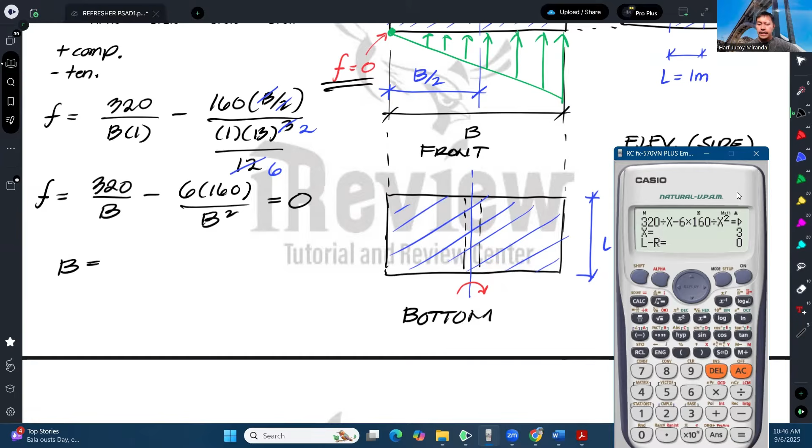Right? So that is our answer for number 13, 3 meters.

Okay? Next item for the same situation.

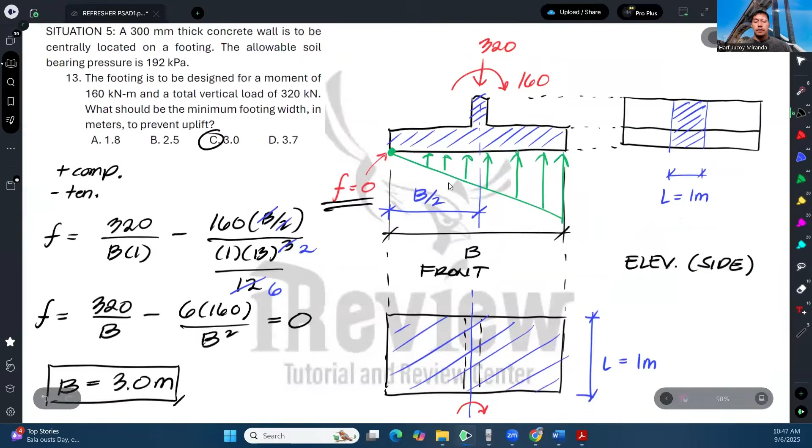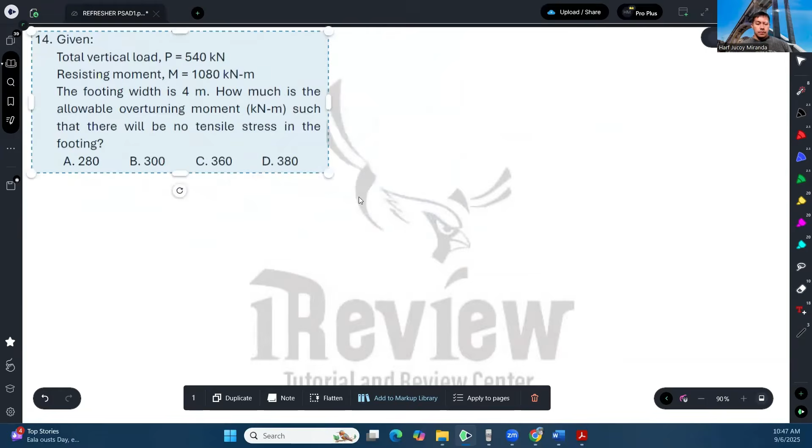Okay, so given, total vertical load is 540. Resisting moment is 1,080 and you're already given the footing width, 4 meters. How much is the allowable overturning moment such that there will be no tensile stress in the footing?

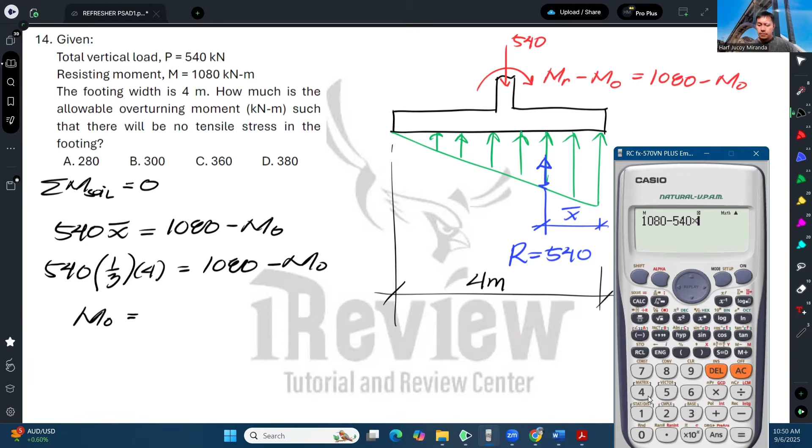Okay, 360 kilonewton meter.

Okay, and that is letter C.

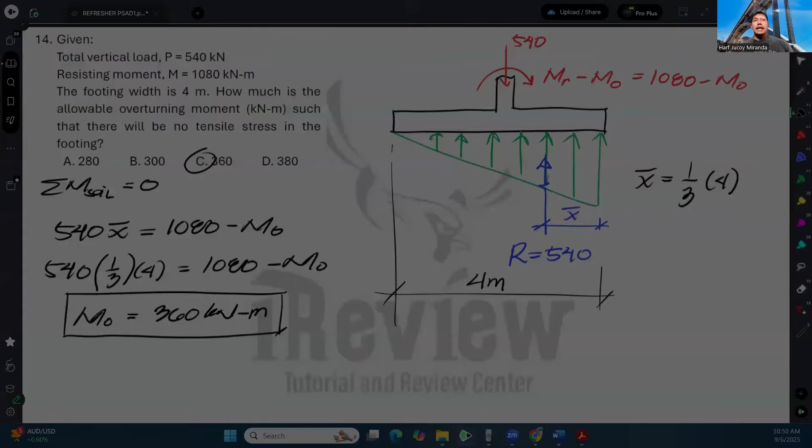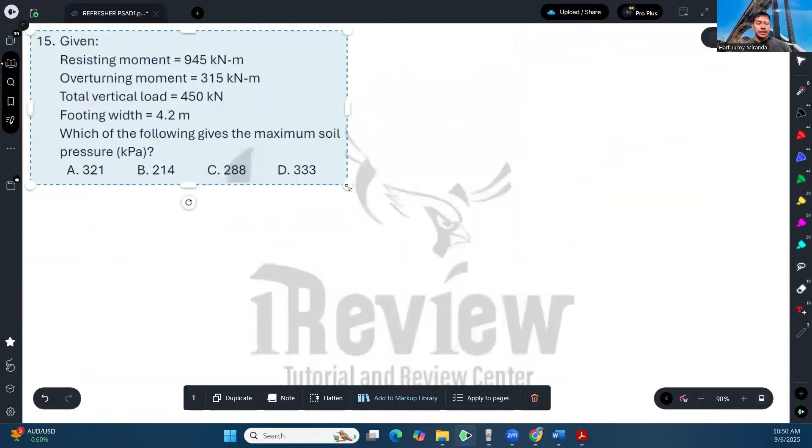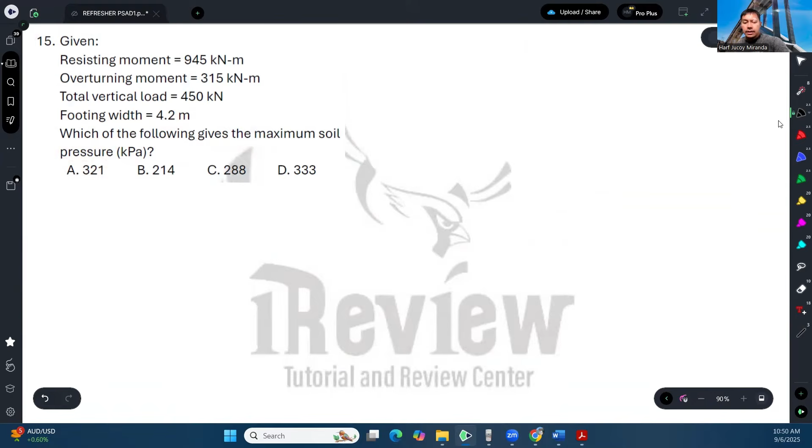Now, lastly, for item 15, same situation. Iba na naman yung given. This time, you're given both the resisting moment and the overturning moment, the total vertical load, and the footing width. So which of the following gives the maximum soil pressure? Actually simple lang sana ito, kaya lang we have to be careful kung meron bang tension, kasi ngayon given na lahat eh. So ngayon tatanong tayo, ano yung maximum soil pressure?

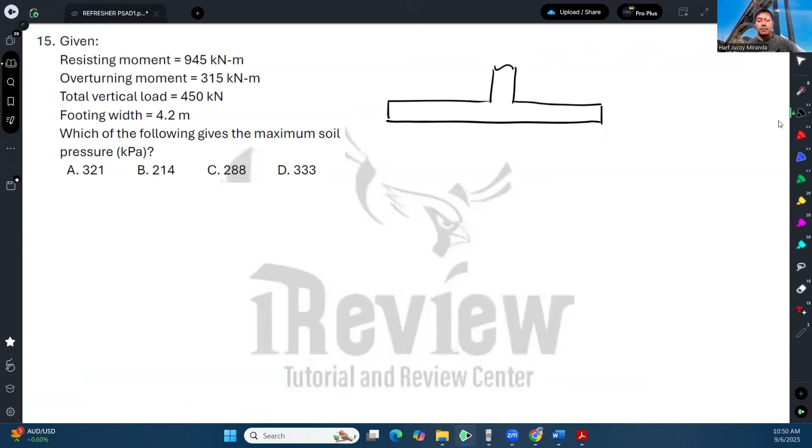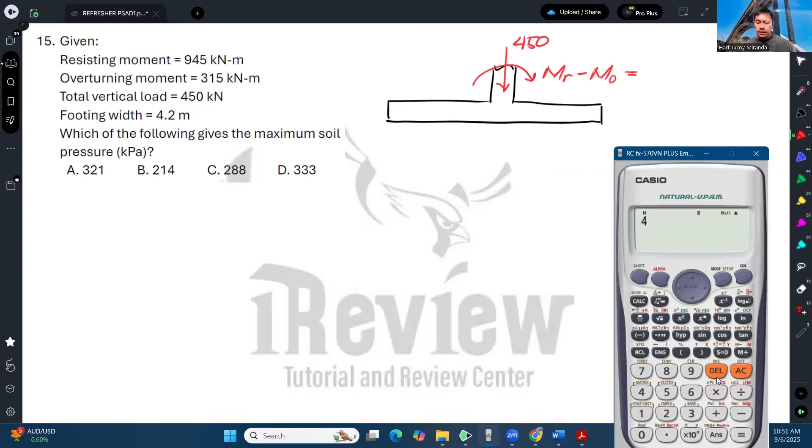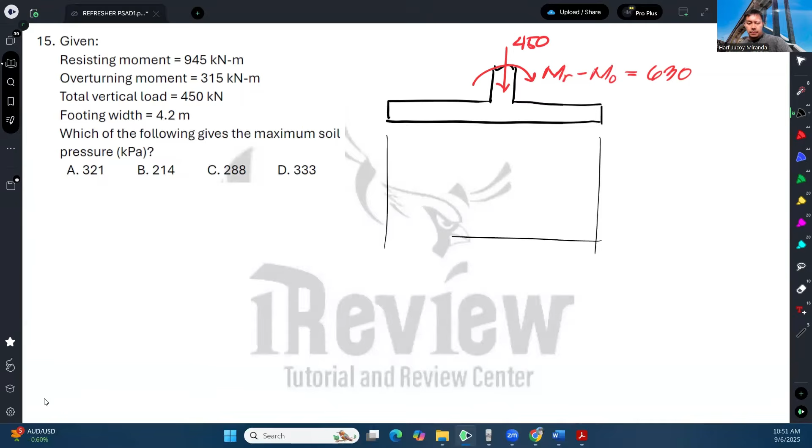So if there is no tension, lagay ko muna ng values, 450, tapos ito MR minus MO. So 945 minus 315, that's 630. And then this is for 4.2. Okay, so ngayon para malaman natin kung magkakaroon ba dito ng tensile stress, kasi dalawa ang pwedeng case na mangyari.

Case 1 is yung pressure diagram mo ng soil, ganito trapezoidal. Ibig sabihin, yung soil mo is under pure compression. Kapag ganyan, to calculate the stresses, gagamitin lang natin yung combined axial and bending, yung P over A plus or minus MC over I, etc.

Pero pag nangyari to, yan, so meron kang tensile part ng soil, hindi na valid yung P over A plus MC over I. Hindi na siya valid. So paano ko malalaman kung meron itong tension?

So merong criteria, yung mga libro, yung ibang mga module, may criteria na kailangan daw yung eccentricity mas malaki or mas maliit sa B over 6, blah blah blah. Pwede niyo kabisaduhin yon, pwede niyo tandaan yon. Pero ang pinakamabilis para sa akin is kunin niyo na lang yung stress dito sa kabila. Pag nag-negative yan, or ibig sabihin pag nagkaroon ng tension, bawal gamitin yung P over A plus MC over I para ma-solve yung stress dito sa maximum.

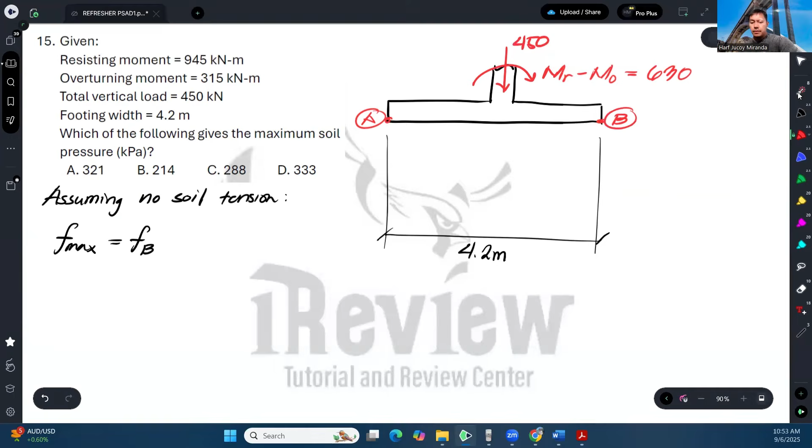So tingnan natin, ano ba ang magiging stress dito? Tawagin ko to na corner A. Kapag in-assume natin na walang tension, no soil tension, so yung magiging maximum pressure natin ay equal sa stress sa B, which is going to be P over A plus MC over I. Assuming no soil tension.

So paano malalaman kung walang soil tension? Kunin mo muna yung FA. So ang FA ay P over A tapos minus MC over I. Tignan natin, very quickly: 450 over 4.2 times 1, kasi nga ano to, wall footing. Minus M, 630, yung C natin ay 4.2 over 2.

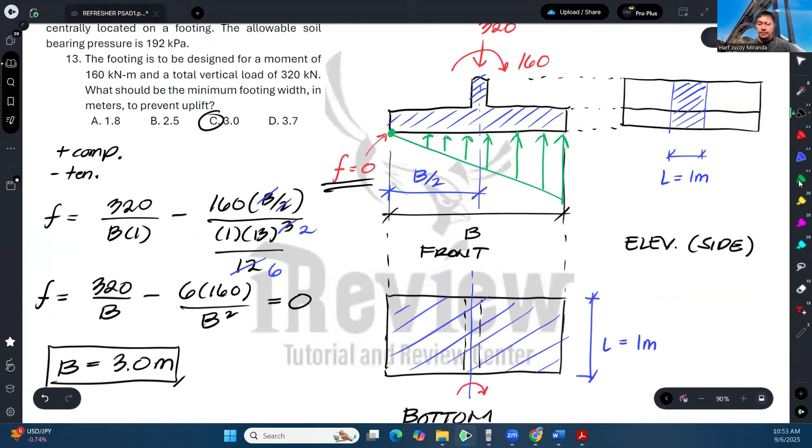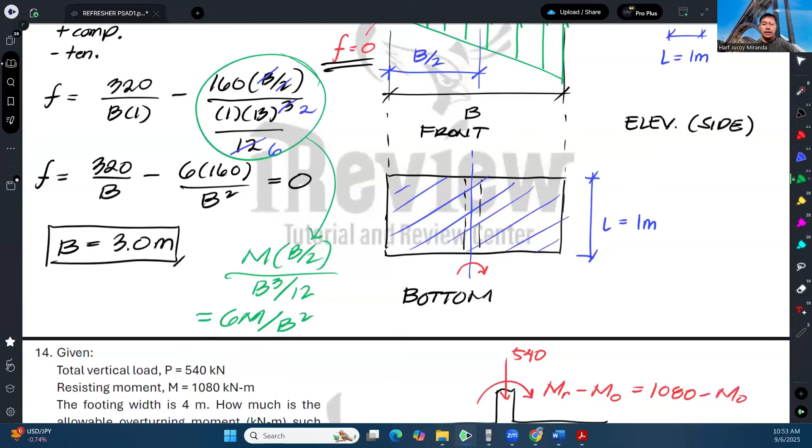Or pwede nyo i-apply yung kanina. So kanina actually, meron akong konting dinerive dito, itong part na to. No, di ba ano yan? M times B over 2, over B cube over 12. So kapag sinimplify mo yan, that is 6M over B squared. Kasi yung ano mo, pang wall footing lang to ha, kasi yung L mo, 1 na eh. So ganyan na siya, gamitin na lang natin yan.

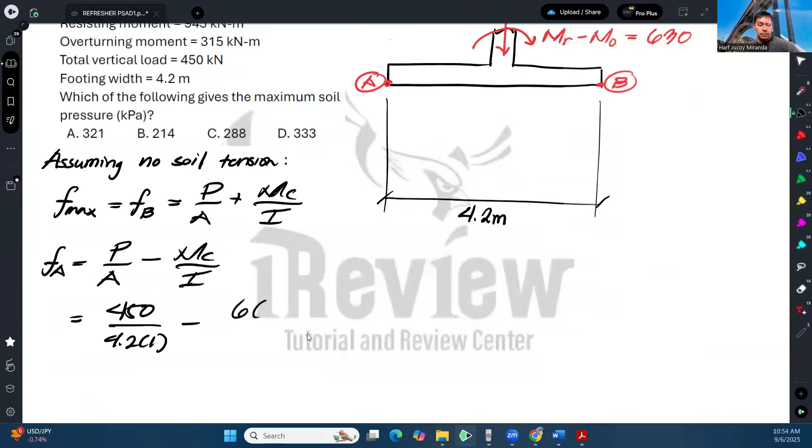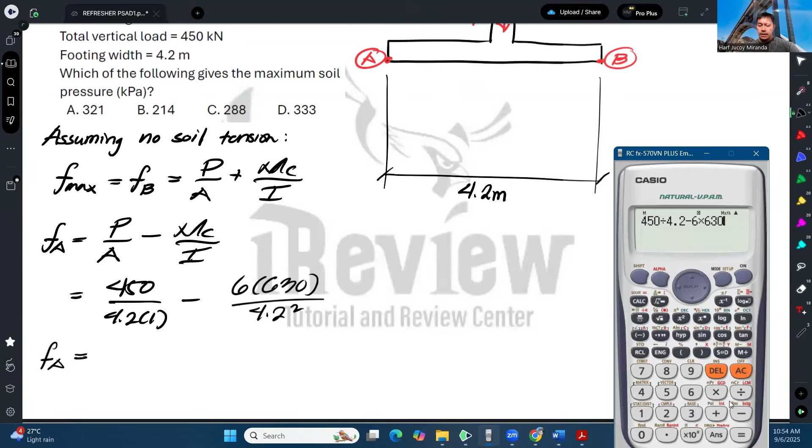Para lang masanay na rin kapag wall footing. Pang wall footing lang yan ha. 6M, ano yung M? 630 over B squared. Okay, tingnan natin what is the stress at A. So 450 over 4.2 minus 6 times 630 over 4.2 squared, and that gives us negative 107. Okay, so therefore, tension occurs, ibig sabihin hindi to valid.

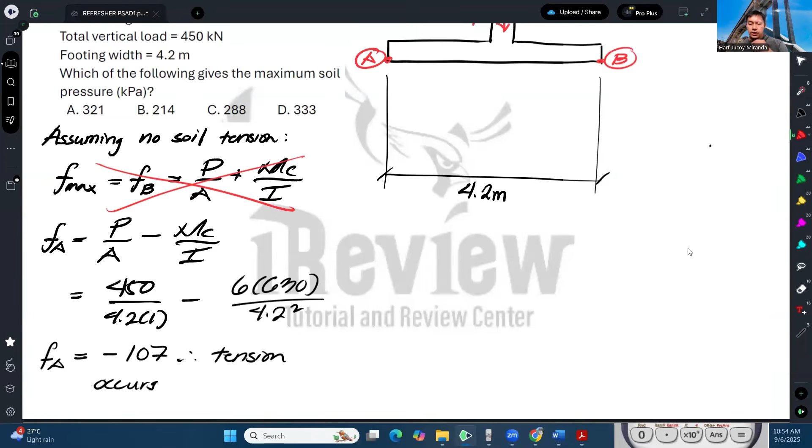So anong ginagawa kapag mayroong tension? Assume natin na yung soil pressure natin, ganito yung itsura, ganyan. And ganun pa rin ang idea: kailangan yung resultant natin ay yung layo niya dito is x bar, which is 1/3 nito, ng length na to. Tawagin ko tong length na to na A.

So dapat yung x bar ay 1/3 ng A. Tapos lumalabas ngayon dyan, ito yung maximum soil pressure. Yan, yun yung maximum soil pressure. Okay, so how do we solve for x bar?

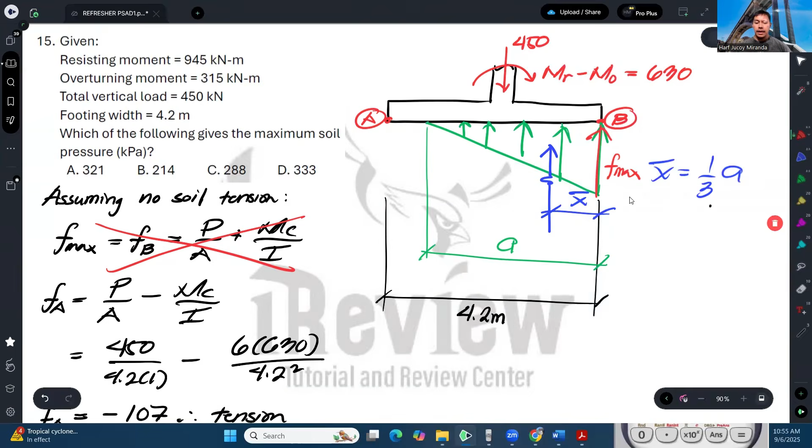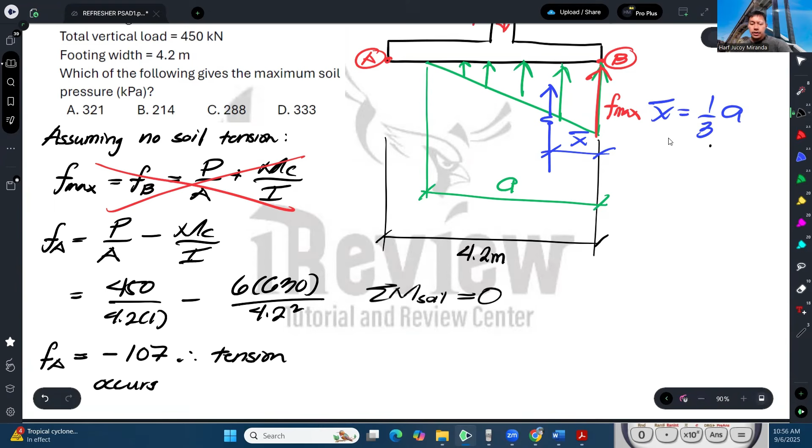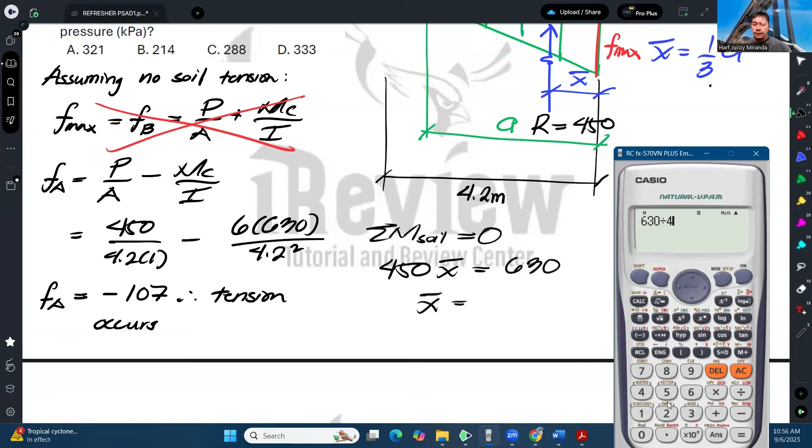So again, we will take summation of moment sa soil. Sa soil, dalawa lang yan: yung reaction dito, which is already equal to the applied force kasi wala namang ibang vertical force dyan. So 450 times x bar is equal dun sa resisting minus overturning na 630. So from here, we can solve for the x bar, and that is 630 divided by 450, that gives us 1.4.

So meaning we can solve for A. So yung A natin from here is just 3 times x bar, and that is 4.2.

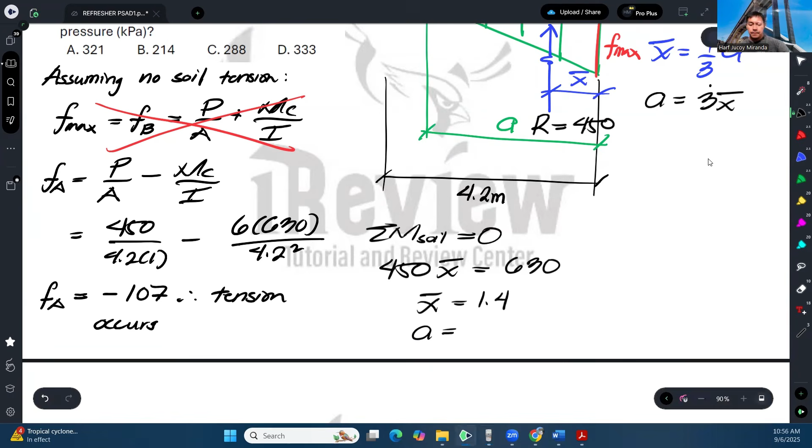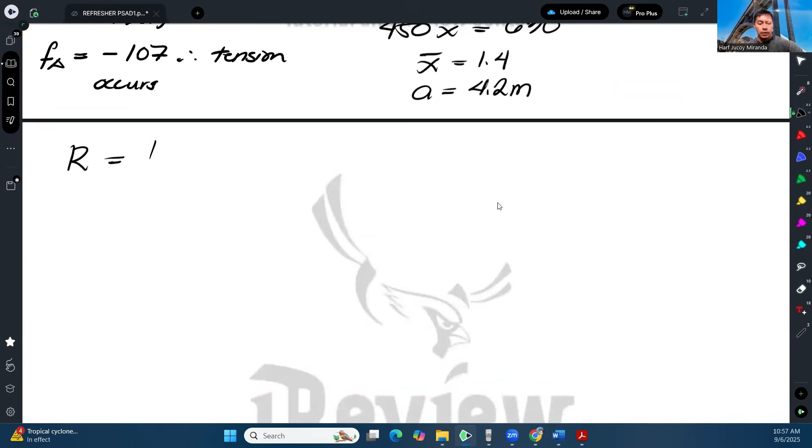Okay, so we can now define kung ano yung Fmax. So how do we define Fmax? So dapat yung equivalent force nito ay equal dito. So bali yung area nito, di ba? Dapat equal dyan. So therefore, we have R is equal to 1/2, ang base natin ay A, ang height natin is yung Fmax. Tama ba? Area ng triangle dapat equal dito. So 1/2 base times height, ito yung hinahanap natin.

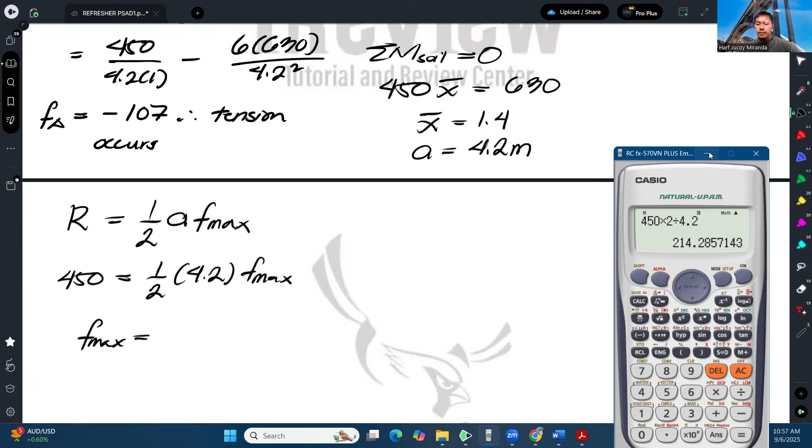So therefore, this is 450 is equal to 1/2, yung A natin is 4.2 times Fmax. So therefore, Fmax can be calculated, that is 214.29 kilopascals, and that will be our answer.

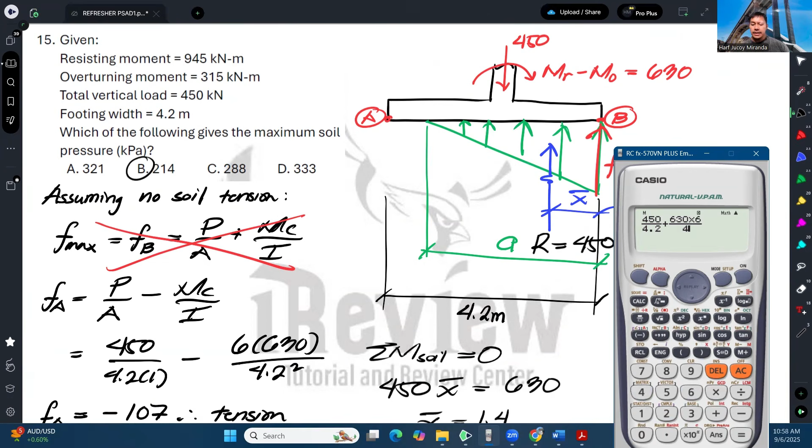Okay guys, had you used this computation na P over A plus MC over I, think 6 over B squared, 6M over B squared, ayan, you will get 321, which is also in the choices, which is wrong. Kailan lang to tama? Tama yan kung wala kang tension dito sa part ng footing. Pero dahil merong tension, hindi yan pwedeng maging sagot.

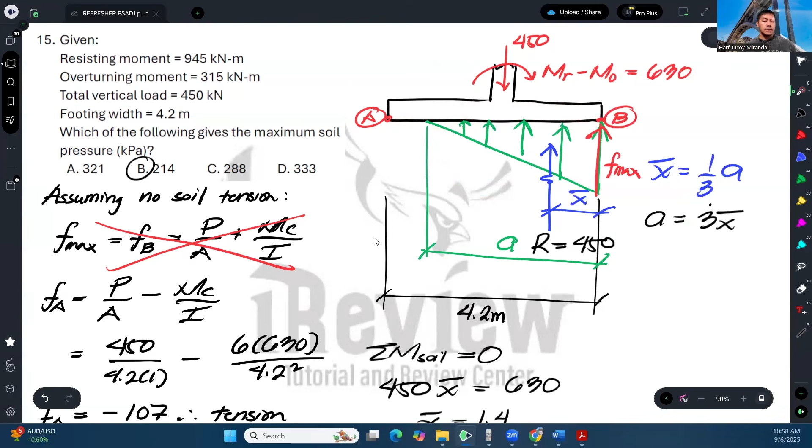Kailangan mong i-drawing yung equivalent pressure diagram, neglecting the tension part. Kasi in reality, hindi naman kaya ni soil na mag-react na pa-tension. Ang kaya niya lang na i-react is kapag kinompress siya, kasi soil lang yan eh. So that's the idea, and that's how we solve this problem.